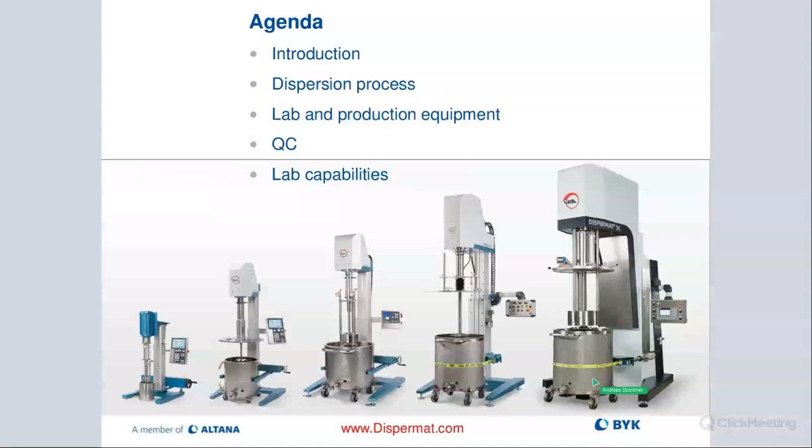And here you can see already on this slide, we offer everything from small-scale laboratory all the way pilot to manufacturing. There's a lot more equipment. This is just a snapshot kind of showing you the line of what we offer.

Okay, so VMA-Getzmann is a German company, founded in 1972 in Germany by this beautiful couple up on the top right, Hermann and Elke Getzmann. They're still alive. Hermann is actually still visiting the office once a week just to make sure that everything runs smoothly and they still follow his design philosophy. The company is run today by his two sons, Martin and Christian Getzmann. They're located about 30 miles east of Cologne, if you're familiar with Germany, kind of in the center of the country, a beautiful part of that region.

BYK-Gardner, or BYK, has had the exclusive distribution rights for North America since 1988, so almost 40 years ago this relationship started. Like I said, the company is still owned by the same family, and they have over 100 employees worldwide. They are known to make really high quality dispersers, different types of bead mills, basket mills. A strong focus is on our basket mill systems, the TML, as some of you are probably familiar with. Then we offer everything from lab scale pilot all the way up to production.

Here you can see on the bottom picture that was the very first Dispermat introduced in 1973. There are actually some customers we know that are still running on the original with the original motors. So these are very well-built systems, and they will run for a very, very long time.

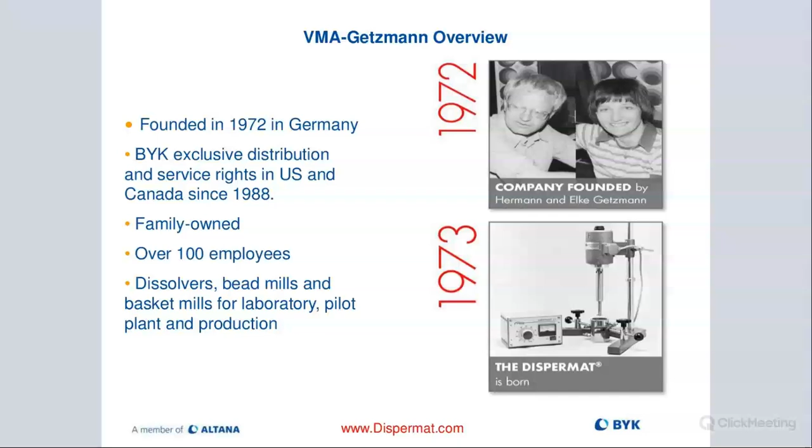So the facility is really state of the art. If you ever happen to be in Germany and would like to stop by and take a visit, please let us know and we can arrange that.

Okay, so obviously dispersing comes out of the coatings world. That's where it's really born, is to break up these agglomerates. And there's different types of pigment classes we look at. So we have the organic pigments, inorganic pigments, functional pigments, and then obviously the metallics, which are the special effect pigments. And they're used to really break down these agglomerates and make these binding forces separate them, and turn these particles to a smaller size.

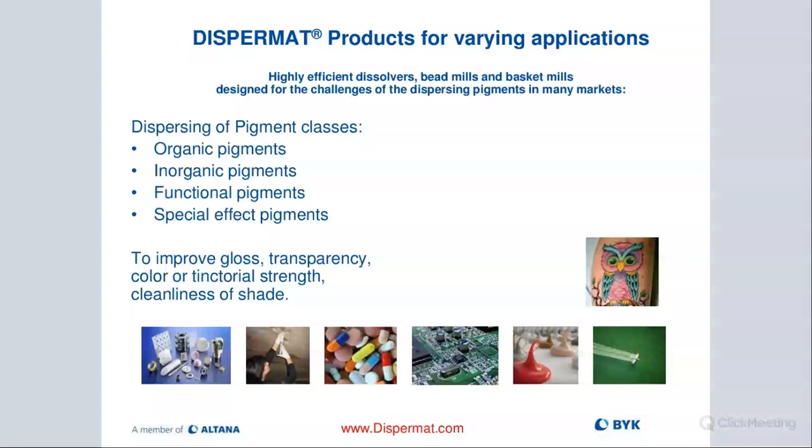So we are dispersing in order to produce better wetting, break up these invisible, almost electromagnetic forces that hold these particles together. They're called the van der Waals forces.

We like to ideally reduce the particles back to the primary particle size, which in turn will give us improved color strength, improve our gloss, give us an overall better appearance.

We can save money by improving our pigment efficiency. We need less pigment because we increase the surface area if we do a proper dispersion.

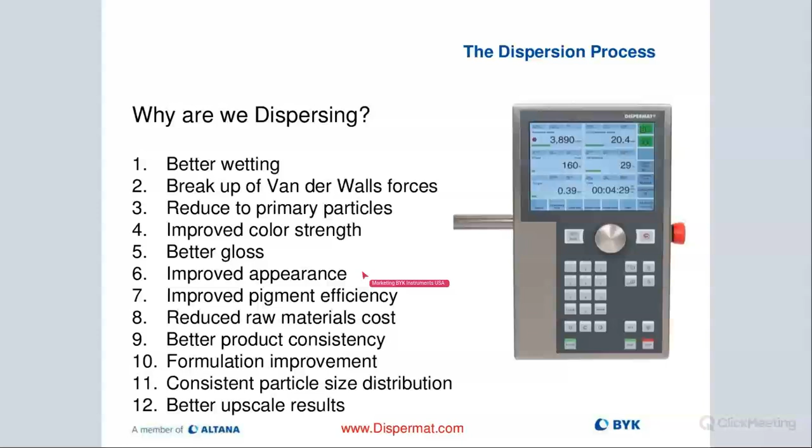And that will help us also reduce the raw material costs, which will then also give us better product consistency, help us with the formulation improvement, and also result in a better particle size distribution, which in turn, if everything is right, should also give us really good upscale results when we go from lab to pilot all the way up to production.

If we don't properly disperse our pigments, then we're going to have some issues. Among those are obviously color shifts, poor stability of our color, pigments flocculate back together.

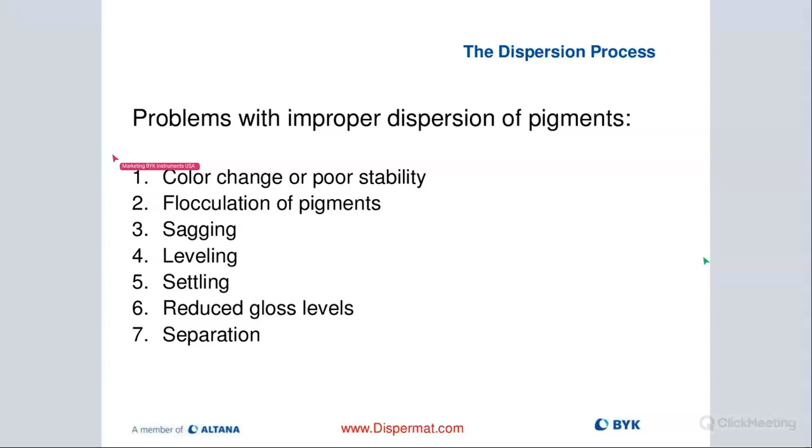Sagging, leveling, and settling are some of the other issues that come up. Our gloss will be diminished. And then also the separation is another problem that we see if we do an improper dispersion of our pigments.

So it's really important to keep in mind that, in order for us to, when we reduce the particle size and we do a proper dispersion, it's really important that we have good stability.

Pigments require strong color fastness to reduce fading over time. Our brightness will be improved dramatically, so this will give us also a much better color. And then pigment size, obviously, the smaller the pigment particles, our transparency would improve, we get better color.

And then, like I said earlier, we can reduce costs by using less pigment, which helps everybody out when we go to market. And then also viscosity.

Usually, we look at trying to keep the viscosity on the lower end. That will give us a better particle size distribution and helps us with processing of the material.

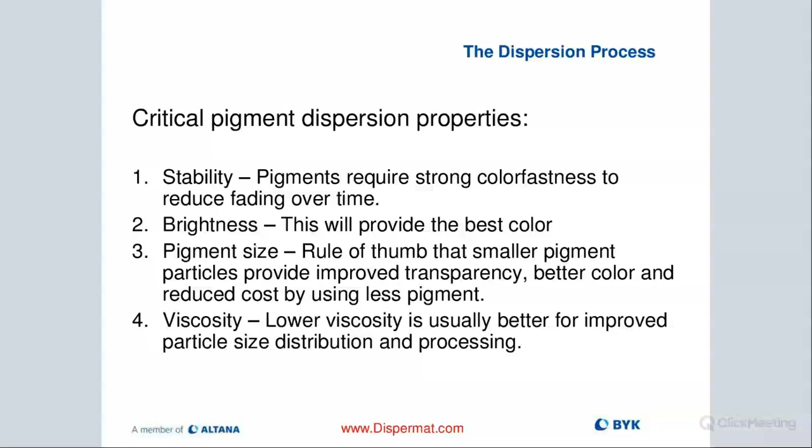If the viscosity is too high, it's very hard to move the material and break up these agglomerates. Also, if the viscosity is too low, then it's very difficult to put in enough energy and the process will just take longer. But viscosity is very critical when we process our slurries.

So critical here is we're not destroying any particles. We're really just looking to breaking up these binding forces. And we are only basically reducing the size by separating the particles and not destroying them. And the agglomerates and aggregates are basically reduced to the primary particle size.

That's the whole goal. And it's really the shear forces. We're using a Cowles blade in the dispersion process with the teeth that help us put in enough shear. And that is really the responsible component for that separation.

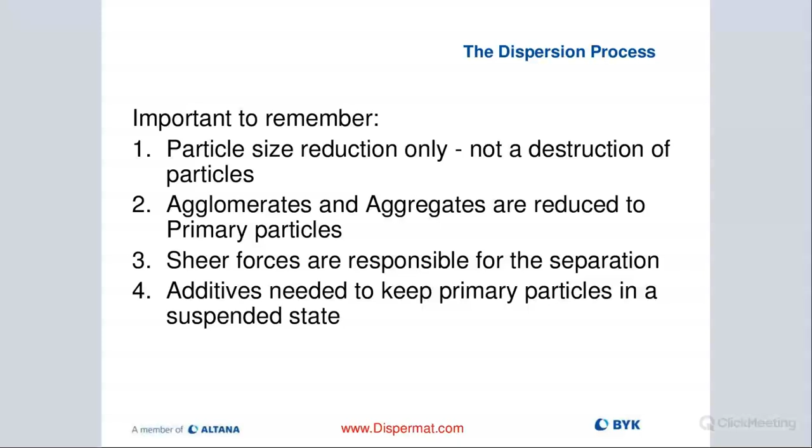And then, as I said before, we need to also look at the right additives to help us keep these particles in a suspended state once they have been separated.

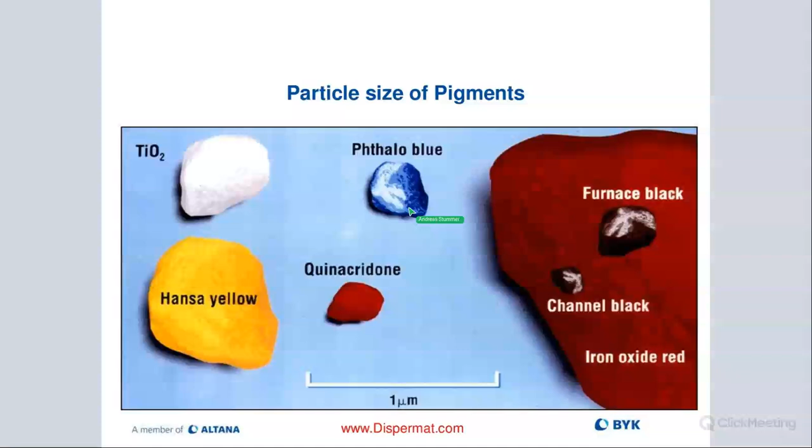This is a good picture here, just giving you a quick look at the different types of pigments. Just you can see the yellow, the Phthalo Blue, just some different pigments here.

By using a Cowles blade, we are able to put in enough shear force to take these agglomerates and reduce them to the aggregate level.

If we want to go from the aggregate level down to the primary particle size, which is a single block, that would mean that we would need to do the milling. That will basically get us from the aggregates down to the primary particle size.

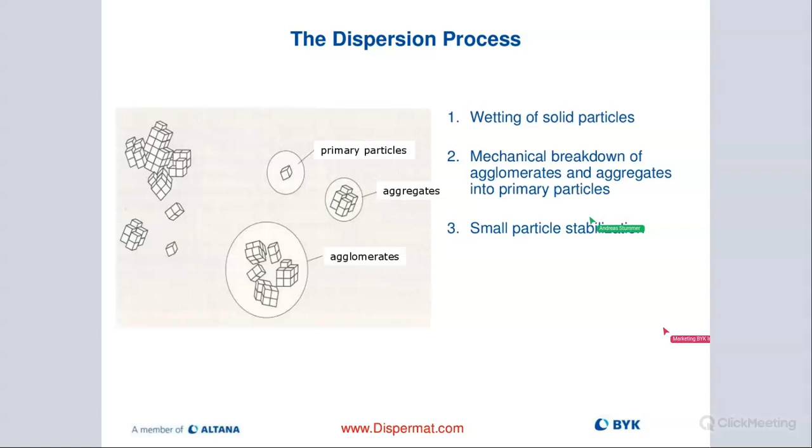But what we talk about today is actually going from the agglomerates down to the aggregates, which will be done via the Cowles blade. So the idea is here wetting of our solid particles, the mechanical breakdown of the agglomerates and aggregates into the primary particle size, and then the small particle stabilization via the additive package.

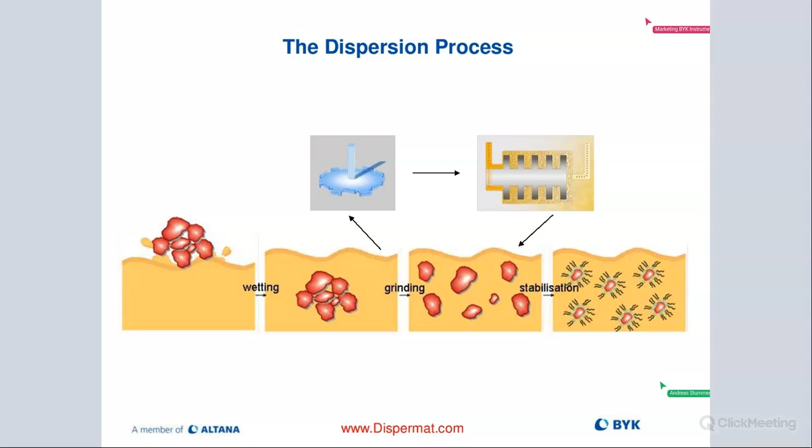Here on this slide, it lays it out really well. You can see with the Cowles blade, we wet our pigments, and then we break up these binding forces, and these agglomerates are turned into aggregates. Then when we reach about 10 to 30 microns, depending on the formulation and the pigment type, is when we actually start the milling process. We want to keep those particles in a suspended state in our slurry so they don't flocculate back together.

Same slide again. This is a great slide, it shows you the breakdown. We always start with the dissolver blade when we pre-disperse. The rule of thumb is about 10 to 30 microns of particle size is how low we can get with a dissolver blade. Anything smaller, we need to look at the milling process, which will be the next segment in a number of weeks. But we can go to about 10 microns with the dissolver blade.

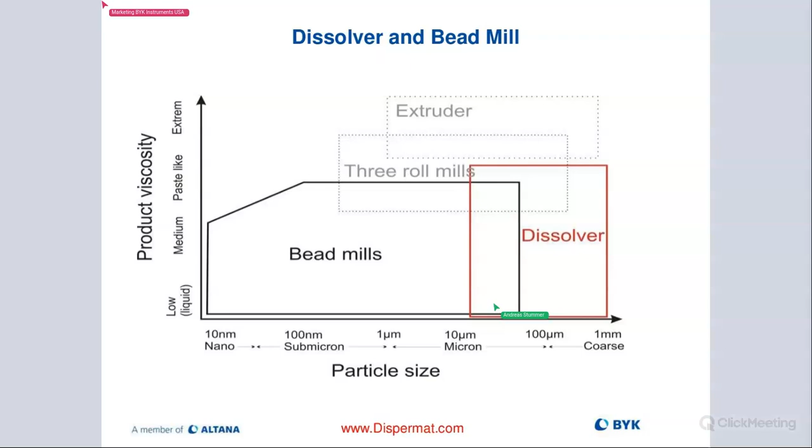Using a disperser or dissolver, one key point is when we use a dissolver disc, we always want to look at tip speed. RPMs are critical, depending on the size of our disperser and the diameter of our blade, but RPMs are only one part of the equation. What we really need to look at is calculating the tip speed. To have a proper pre-dispersion, to put us in the right window, we need between 18 to 25 meters per second of peripheral speed, or tip speed, which is the speed of our blade spinning. For that, we use dissolvers.

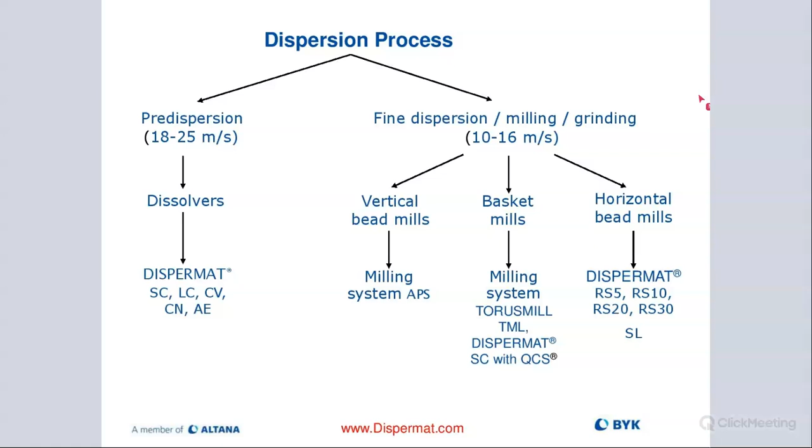This is something we offer seamlessly, not only for production, as you can see here with the SC, but also with all of our smaller laboratory machines. Horizontal bead mills are also used if you really need to reduce particles below 500 nanometers - a horizontal bead mill is required. There we have a whole range, the RS series and the SL for our lab, which I will show you later.

When we start dispersing, we have a container, and we always need to look at the ratio of blade to container. The rule of thumb is we start out with about 1/3 the diameter of our blade to our vessel. That's optimum, if we have a medium viscosity, anywhere from 3,000 to 5,000 centipoise. If our viscosity is lower, we want to decrease our blade diameter. If our viscosity is higher, we want to increase our blade diameter to keep the product moving.

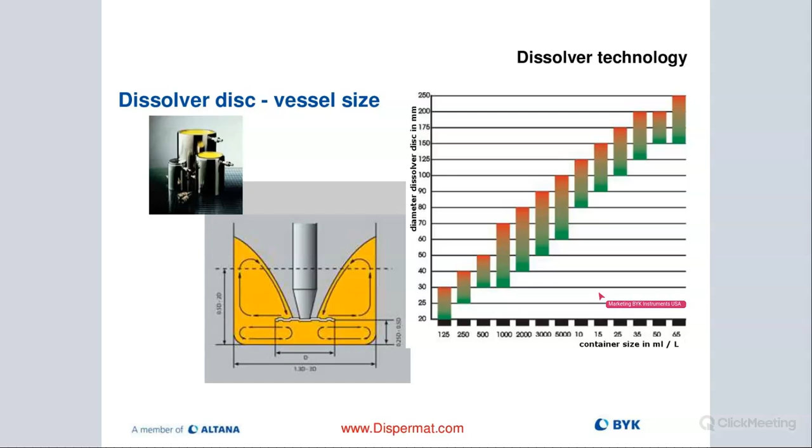You can see on the right side is a chart, and that shows you on the bottom the different container sizes in milliliters. You can clearly see that there is not one blade that fits every container, so we actually have a range. If I take a 1 liter container, which is about a quart, I can use a 30 millimeter blade all the way up to a 70 millimeter blade, depending on the viscosity. If my viscosity is super low, almost like water, I would use a 30 millimeter blade. As my viscosity increases, I would then use a larger blade diameter, all the way up to 70 millimeter. So there's quite a range, but the rule of thumb is optimum is about 1/3. That also means the viscosity and the mill base has been optimized to get a good, proper dispersion.

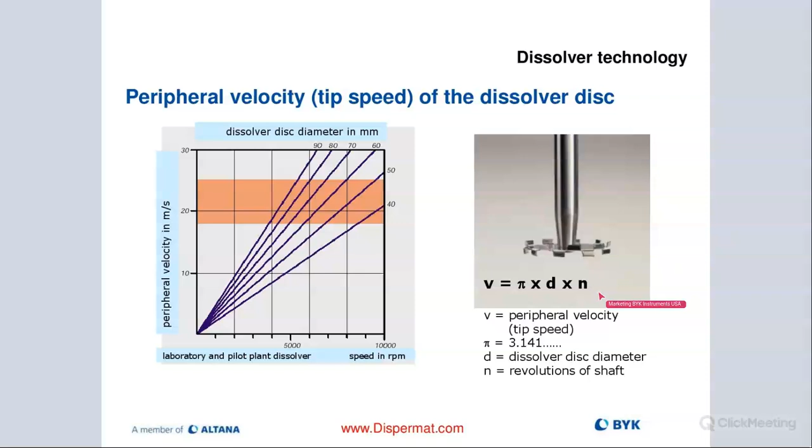If your viscosity is lower, almost like water, say 500 centipoise or less, it's more difficult to achieve the donut, because it would immediately collapse as soon as it's formed, since there's not enough viscosity. And if the viscosity is too high, you probably won't see a donut either, because the blade spins in there and never really gets to form the donut because it's so thick.

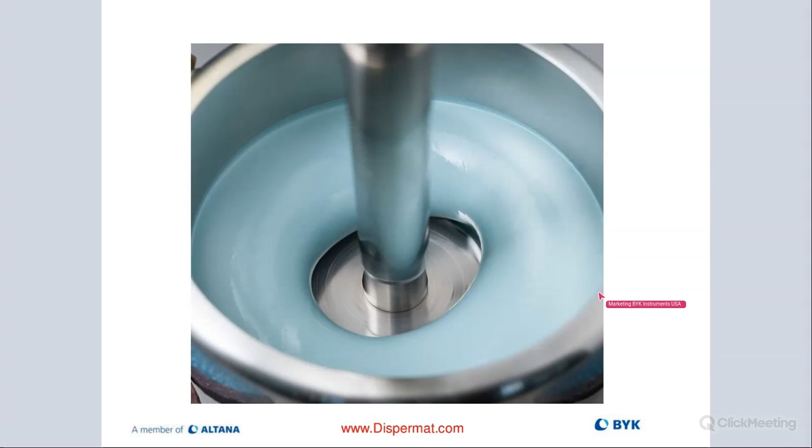But it doesn't mean that you're not dispersing. If your viscosity is low, you just don't see a donut, but you're still dispersing. You may need more time to break up these agglomerates, or change the blade diameter or the amount of energy you're putting in. But you're still achieving a pre-dispersion if you run 18 to 25 meters per second.

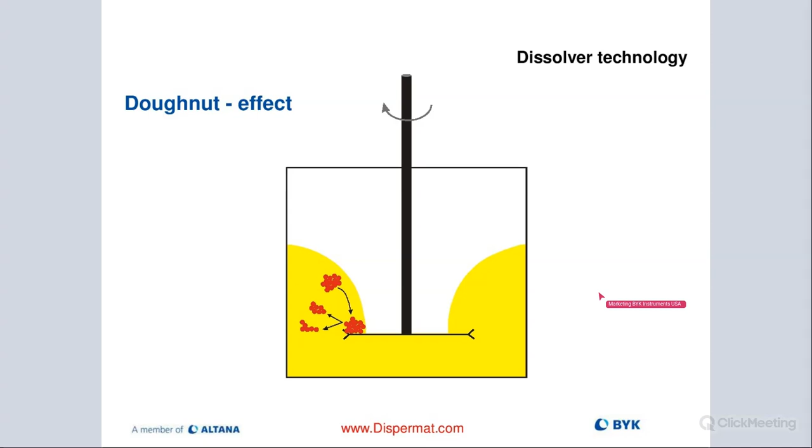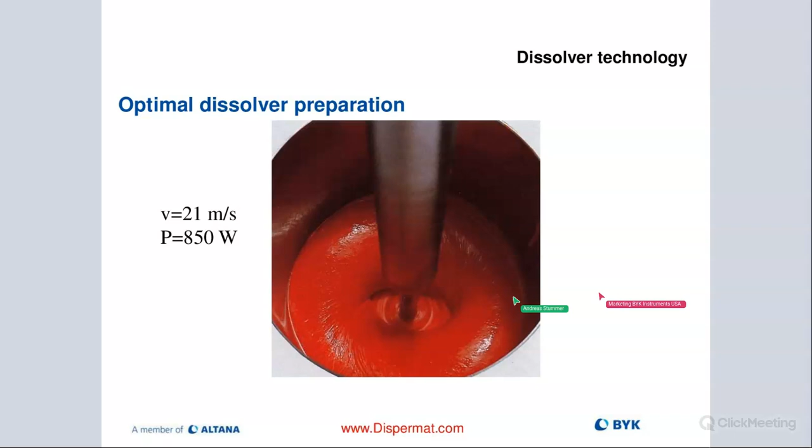Here again you see a nice looking donut. We are putting in about 850 watts of energy, and our tip speed is 21 meters per second, which is optimum, again 18 to 25 is the area we want to be in. Everything looks really good, and we are properly pre-dispersing our material.

Then we have the case where our tip speed is optimized, but we are only putting in 320 watts of energy. Here, our viscosity is very low, and that means it's more difficult to put in energy. This tells you that you'll probably need to disperse longer or change something to get the desired result, or you may want to adjust the formulation to increase the viscosity so you're able to put in more energy for reaching a proper pre-dispersion. This is where the donut is having a difficult time forming because there's not enough viscosity. You could try increasing the tip speed, but it would probably be better to look at the formulation and see if an adjustment can increase viscosity somewhat, allowing us to put in more energy.

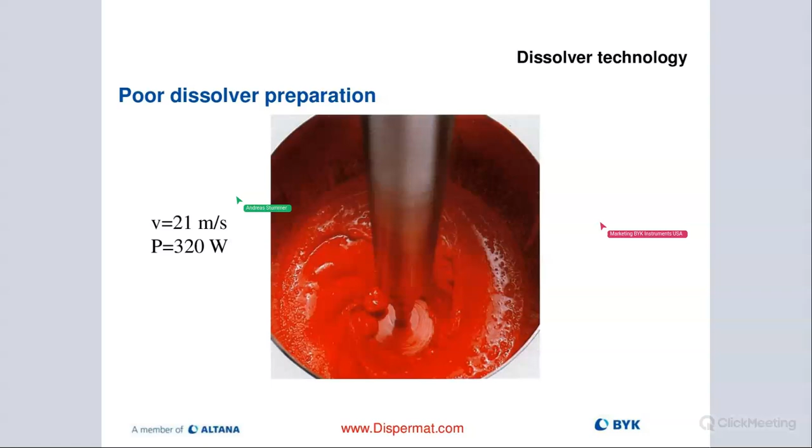Then we have the issue I talked about earlier where we don't have any donut effect. Here, our viscosity is very high. It doesn't mean we're not dispersing, we just don't see a donut because we are still putting in 900 watts of energy, which is really good, but we just don't see the donut due to the high viscosity. So you may want to look at lowering the viscosity a little bit to put it back into that optimum window, but it doesn't mean you're not dispersing, it's just that you don't see a donut in this case. If I look at the amount of energy, 900 watts, pretty good, and you're running at 21 meters per second. So you may be able to make some adjustments to the tip speed, but this right there is a prime example of a very thick material.

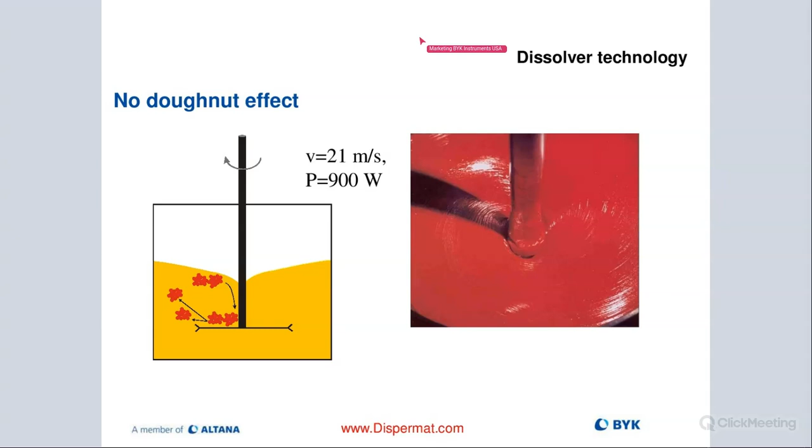Okay, so in order for us to optimize—John, can you move your mouse, the marketing instruments, out of the way? It's popping on the screen, sorry about that, a little bit like a fly flying in front of. Sorry, all right, fly is gone. Continue. Okay, thank you.

So in order for us to optimize the dispersion result, we want to look at the duration of our pre-dispersion. Again, the donut effect, that visual cue we're looking for. Tip speed, really critical, 18 to 25 meters per second. Geometric consideration, meaning the ratio of blade to container.

If the viscosity is higher, we want to use a larger blade. Lower viscosities, we want to reduce the blade diameter. Different types of impeller discs are available. You can see on our website there's a whole range, different arrangement of teeth and designs, also different types of materials. Some people prefer ceramic, DLC coated, or so on. So there's a whole range of different impeller discs.

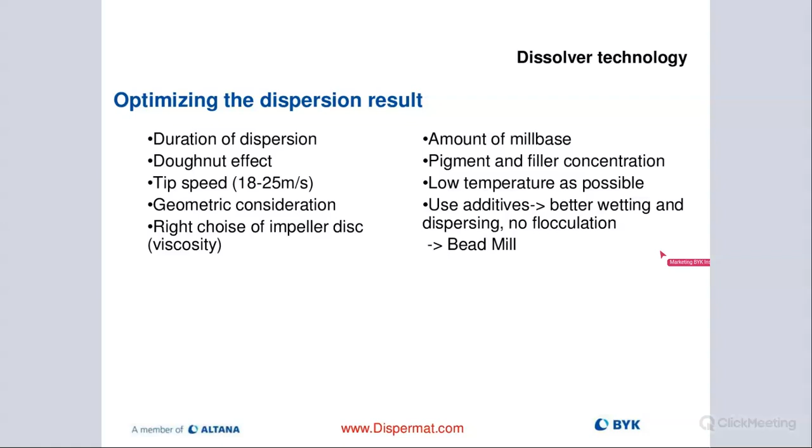Otherwise, the temperature will just rise very rapidly, and we want to avoid that. And then again, additives are critical to give us better wetting and dispersing effect, and no flocculation afterwards, so that the pigments stay in a suspended state. And then the next step would be, once I reach my 10 to 30 microns, that's when I would actually start the bead milling process.

So it's critical to distinguish between the two different processes. When we use a dissolver with a Cowles blade, we're only able to put in a limited amount of energy, just because we're only working with the blade. We don't have any media, no beads. That means our shear forces are going to be somewhat limited, and we are really only deagglomerating our larger particle clusters. We are not really breaking down the particles to the primary particle size. So we're kind of stopping at the aggregate level.

If I want to take the aggregates and go down to primary particle size, that's when it's critical to start the milling process, and it is a critical step for the entire dispersion process. So you can't take your material and go straight to a media mill. That would probably lead to clogging of your screen or dynamic gap, and then you're not going to have any flow of your material. So it's very important that you first pre-disperse before you start the milling.

And then again, as you saw earlier, you're going to have problems with the quality of your product. If you only pre-disperse and you don't mill, you're going to have poor color development, insufficient gloss, those issues, cleanliness of shade, lack of transparency. So that's all going to be related back to just using a dissolver blade and not milling. When we are bead milling, we're going to be able to put in a lot more energy with the beads and the rotor.

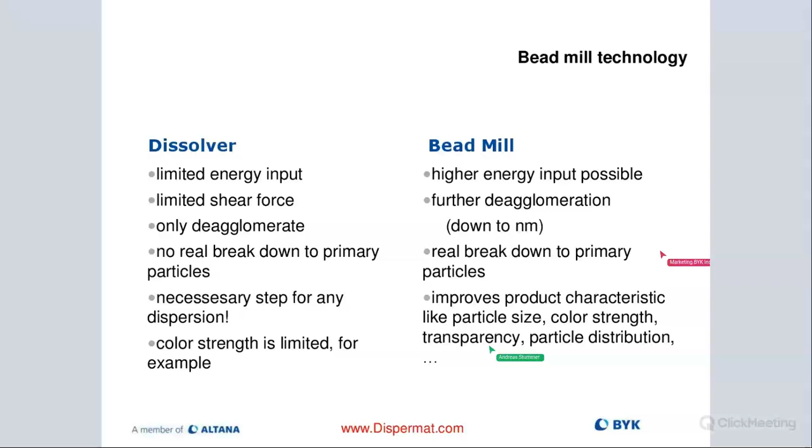It's no problem, but you have to use the right media size to get you down there, and that will give us the best looking product. It also helps you save money because you create more surface area, which helps you cut back on the amount of pigment in your formula. It gives you better color strength, better transparency, and overall better particle size distribution when you properly mill your material.

So here's a picture of the lab scale dissolver. In this case, we're looking at an AE model. Here we have a number of different safety features, including the working area adjustment, which we call H1 and H2.

So if you look at that container, we can actually set a threshold for the upper limit and the lower limit. That means you can safely operate the disperser with the blade in between those two reference points, which we call H1 and H2.

So let's say somebody were to pre-disperse and run, let's say, 10,000 RPMs, and you were to lift the up button, then the blade would stop at the upper reference point you set, depending on the container size. That means there would be no moving parts outside of the container, no product splashing around your lab, and nobody would get hurt by the blade spinning at 10,000 RPM.

And then on the bottom, we can also set the threshold so that the blade would not hit the container bottom. It's also important that you don't want metal scraping, so that's really critical.

The H1 and H2 are standard with our laboratory dissolvers, with the series, the new CV3 Evo, and also our CN model and AE flagship model that you can see right there. Depending on the size, we can go all the way up to about 20,000 RPMs.

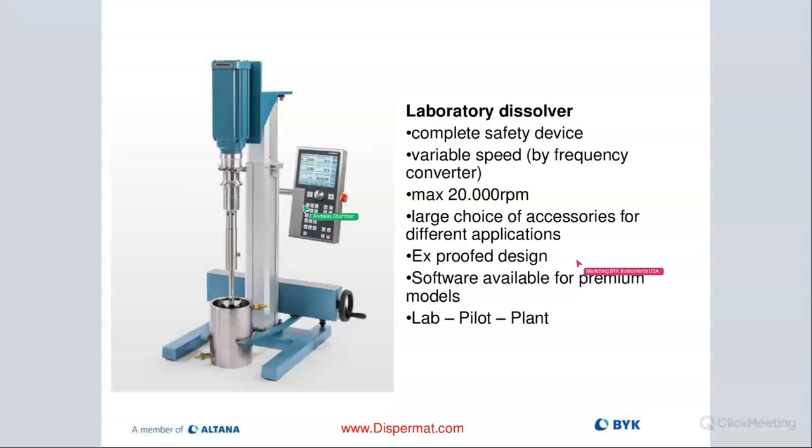You also have the ability to look at a chart, graphing all these different values, so you can see a trend line for your speed, your energy input, your torque value, and your temperature. So it's really helpful, and the C technology allows you to do that. It's available not only for the lab scale, but also pilot and plant size models.

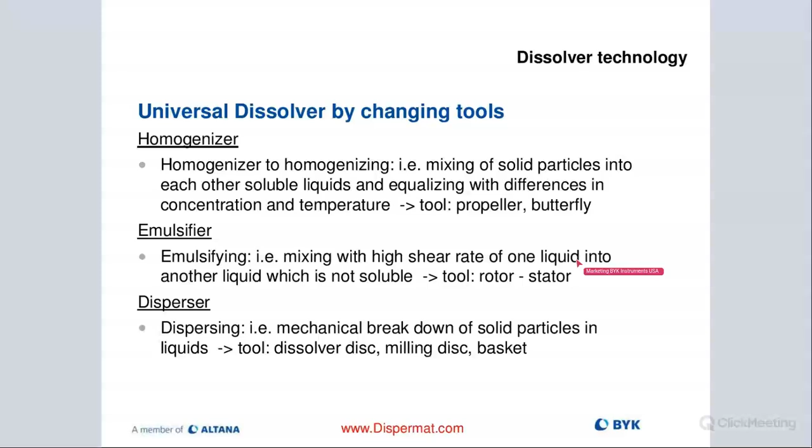So this Dispermat, our dissolver line, can be used as a homogenizer, where you mix, using a propeller blade or a butterfly stirrer blade. You can use it as an emulsifier or as a disperser, where you actually break up these invisible forces, these van der Waals forces, with the cowles blade, and then convert it over to a mill, depending on the attachment that you put on there.

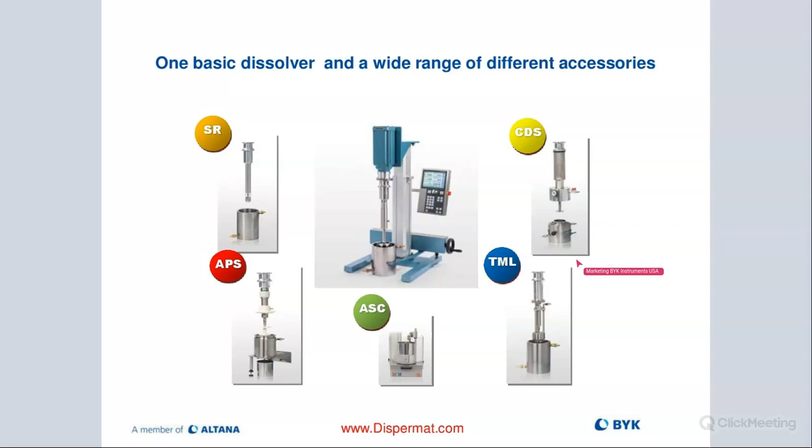We have this quick change system. If you look at the shaft in the middle, right below the motor, there is a clamping ring, and that whole assembly — you remove the clamping ring, turn the shaft assembly 180 degrees, and pull out the shaft, then replace it with any of these attachments, except the wall scraper system. It takes less than a minute, and the dissolver will turn into a rotor stator or a milling system.

So just giving you a quick overview, I don't want to spend a lot of time on that. We have a whole different range of dispersers.

For laboratory scale, very small volumes, something very simple, easy to use, we have our LC line, no real bells and whistles. It does have the safety features, but basically you are looking at a control panel that just shows you the speed and a timer function. That's all there's to it.

You would lift the motor up and the shaft manually. You can see there is a lever on the right side of the motor, and you turn that, and then you can lift the motor up and down the stand, positioning it at the right height. On the smaller scale model, like the LC, that's really easy to do because the motor isn't that heavy, so it just slides really nicely up and down, and you can position it where you want the blade to be.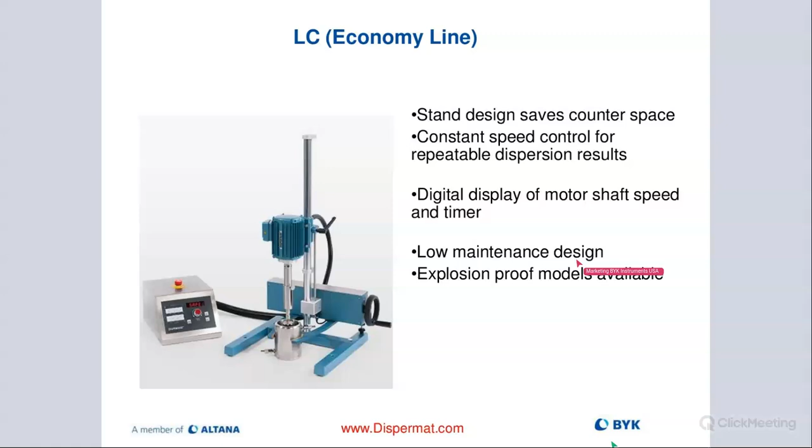You see the wheel on the right side of the clamping system, right above the stand. That actually is used to loosen and tighten the container clamp. It's very important that the container is always clamped absolutely tight so that it doesn't wiggle around. You don't want it to move and then the blade hitting the container wall at very high speeds. That's not good, especially when you're running with solvent based products, and you always want the blade to be perfectly centered, so that will help you really center the blade and make sure it doesn't get in contact with the container walls. And then we also offer an explosion-proof version with our LC line, the LCEX.

This is the new innovation this year, the CV3 Evo. It's replacing the standard CV3. It comes with the CV control panel, which is almost the same as the C control panel, so you're able to look at your speed, your energy input, your torque value, your timer function.

You have a temperature readout. We offer a basic and advanced version. The advanced will also have the integrated scale, which allows you to take measurements, and then you can actually see the measurements on the display, which is really cool. On the advanced model, you can also track and store all the data, so if you want to look at that later on, or you want to create a lab report, the advanced model is designed to help you do that.

This is really good technology for scaling up. So if I want to use all the data and go from lab to pilot or production, then these are the values that I'm looking for. It'll also give you the actual tip speed displayed on the top right of our control panel, which is the critical value we're looking for, 18 to 25 when we are pre-dispersing. And then if I put a basket mill on here, I'll be able to see the same values, but then I want to be running at 10 to 16 meters per second. I can't say that enough because the question always comes up: how fast are we running our disperser? What are we looking for? Or if we are milling with the system, what are we looking for?

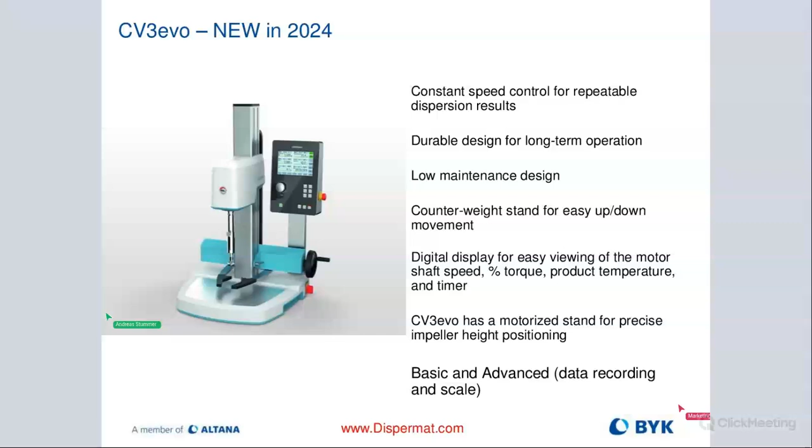Then we have the CN line, which is kind of our bread and butter instrument for small to medium-sized batches. We can also upscale that to pilot. It has the CN control panel, giving you your speed, torque value, temperature readout, and a timer function.

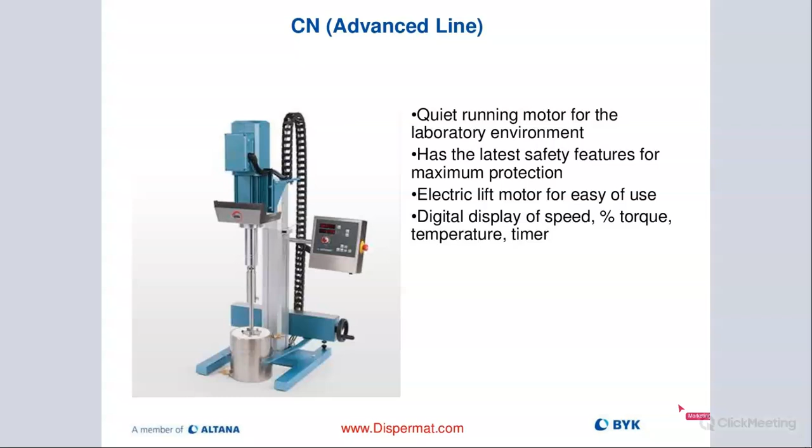Again, all the safety features are built in, as I mentioned earlier, but the beauty of it is that it's scalable. So you can see here, you're staying within the CN line, but now you're looking at a pilot scale model, again with the same brushless step motor technology, even on the larger models.

They are really, really quiet and there are hardly any vibrations to the motor. The shaft goes straight into the motor, so there are no belts or O-rings or anything like that you need to replace. They're practically maintenance free.

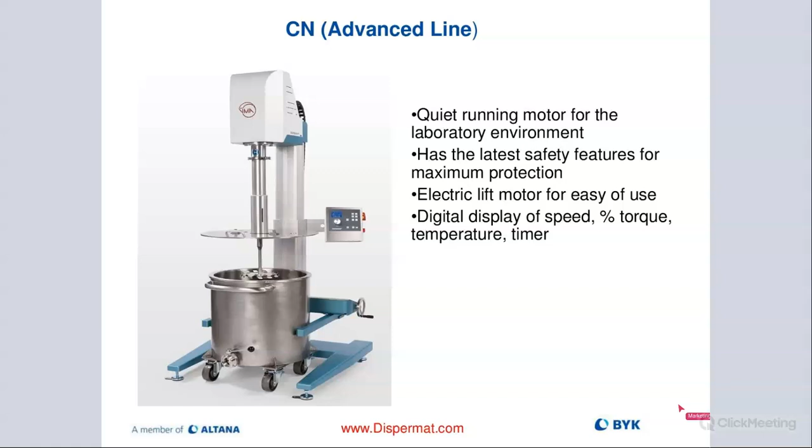And we have customers that are really running on the original Dispermat motors for over 30 years. I've been with the company for 18 years now, and I've never seen a broken motor. That speaks for the quality and the design - just a really, really, really well-built piece of equipment.

Then this again is the AE with our C control panel. That's like the flagship model that we have, especially useful for upscale. And we also offer pilot scale models in the AE line.

So very cool - you can basically create batches, store the data, give batches a name either by product name or by product number. You can upscale really well because you have all the data. You can see on the display the actual trend lines for each of the values.

During the dispersion process, you can do a net power calibration, which basically means you can set all the values to a zero point when you're running without product in the beginning, because as the machine is spinning, the motor is turning, the shaft is turning, it's already using energy. By doing a net power calibration, you can set that value to zero, meaning all the values are only related to your product, like the energy input or torque value, with no influence from the machine itself. That's the net power calibration feature.

You can program cutoff values, meaning if you have a temperature limit and don't want to exceed, say, 80°C, you can program the machine to cut off once it reaches 80°C, or give you warnings before - there's two different warning stages. You can program it so you say, I want to be warned at 70°C and at 75°C, and at 80°C the machine will turn off or run with a different speed or energy input. So you can really customize it the way you think it works best for your process.

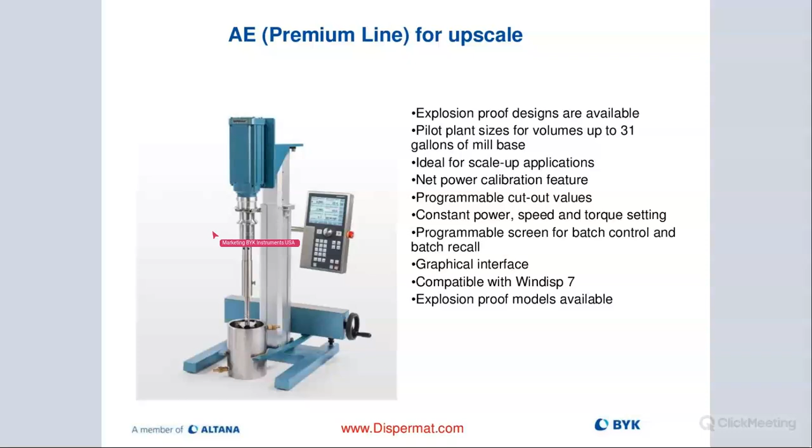And then we have explosion-proof models as well. We can go all the way up to 31 gallons of mill base. Ideal for scale up, if you want to go to production.

Again, because we're using the C technology, we can do the net power calibration, program these cutoff values, and set up the machine to run not only with a certain speed, but also with the amount of energy we want to put in. That means if I'm running with constant power, as the viscosity changes during the dispersion process, my machine would automatically adjust the speed to always maintain the amount of energy we are putting in.

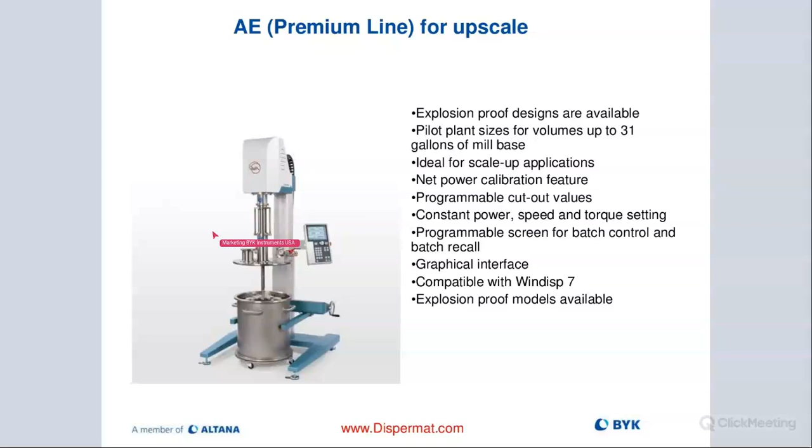Fully programmable, explosion-proof models are available, not only lab scale, but also for the pilot scale models. Then we offer a whole line of production dispersers.

So you're looking at the Dispermat SC. We can go up to about 2,000 liters of volume. The beauty of it is, again, fully modular. We have that quick change system.

We can very quickly fit a basket mill on there, meaning I'm buying a dissolver, but let's say I want to also mill with the same machine. I get the quick change system, and now I'm milling with the basket mill. It's perfect, so I don't need to buy multiple pieces of equipment. Everything, dispersing and milling, can be done on one machine.

Some people require vacuum, so that's also an option with the vacuum cover and the vacuum container. We can pull out the air for better dispersing and milling effect. We can also add nitrogen if we want to create a nitrogen blanket, or argon gas, for some new end-use market applications like fuel cell development or batteries. So that's also an option. The cover is removable, so you have access for cleaning.

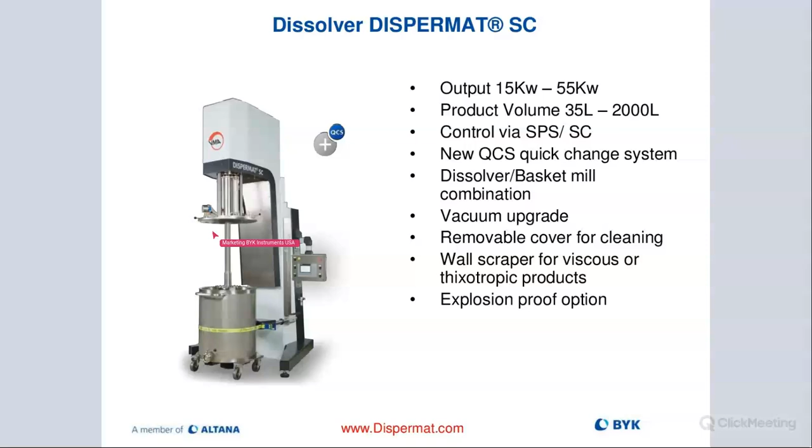And then certain materials that are very viscous require wall scraper systems, so that is also an option with our production scale machines. And then again, explosion-proof models are available.

So if I want to transfer from the container to another container, air is the big enemy. By removing air, I have a much better transfer efficiency from one container to another if I'm pumping out my material. That means I have much faster product transfer, improved homogenization, cost savings. I'm going to be doing everything quicker.

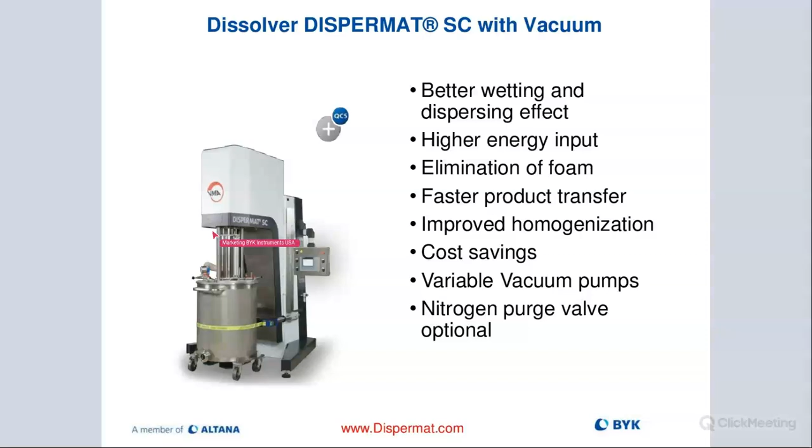There's different types of vacuum pumps that we offer depending on the container size and how much vacuum you need to pull. And then again, we have the option of adding ports for nitrogen, argon, or any other type of inert gas you may want to use.

Quality control. Quickly on the left, you can see the C control panel giving you your speed on the top left. Then right below in watts, the energy input, 2,380 watts right there. Right below that, we have an indirect measurement of our viscosity in terms of torque. On the top right, we're actually showing you the tip speed, 25.4. Temperature readout, 42C. And then on the bottom, we have our timer function.

Then the two windows on the top right corner, you can see H1, H2, which is the safety device for our reference points, container reference points, and then the container clamping safety system right below. They would light up green when they are operational, or the machine is in safe mode. If one of those two is not in a safe state, it would appear red, and then you wouldn't be able to turn on the machine.

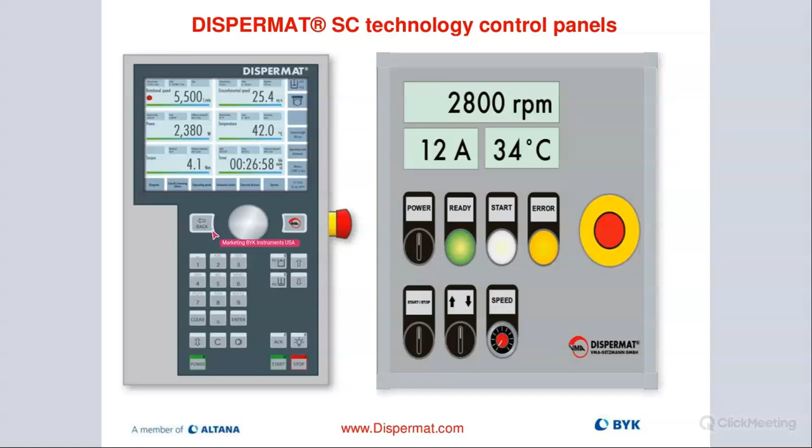We offer that for the lab, pilot, as well as manufacturing size machines. And then on the right side, we have a very simple control panel. We call it the M technology for manufacturing. Some customers prefer really simple in the manufacturing environment, a little bit more sophisticated for the lab, but we offer both options.

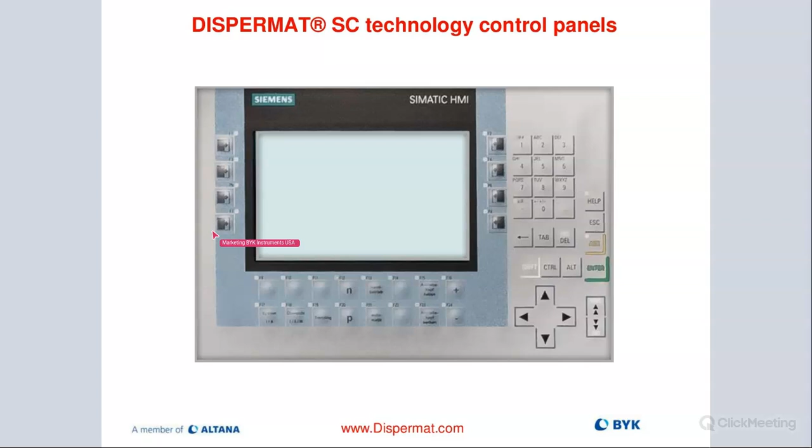And then obviously, here is a PLC controller made by Siemens. We work with that company, giving you the flexibility of doing your own programming and maybe integrating that system to your entire workflow process. If you want to add a scale, a load cell, or anything like that, they can all be programmed, and then that would be the ideal solution for that.

Here is just a snapshot of the control capability with the C technology. So, for example, we have a Blue 1, just give it a name, and then you can program how much energy you want to put in. In this case, we have 5,000 RPMs. We're not running with constant power.

Then the diameter of our blade is 50 millimeters. The container size is 1,000 milliliters. We're using H1, H2 settings, so the height is 80, the bottom is 5 millimeter. The actual disperser blade height would be 14 millimeters. The timer is set to 45 minutes.

And then we have on the right side the cutoff values for all of our different indices, and then we have the graphical interface. Actually, these are pictures from an older version of a C controller, but you get the idea.

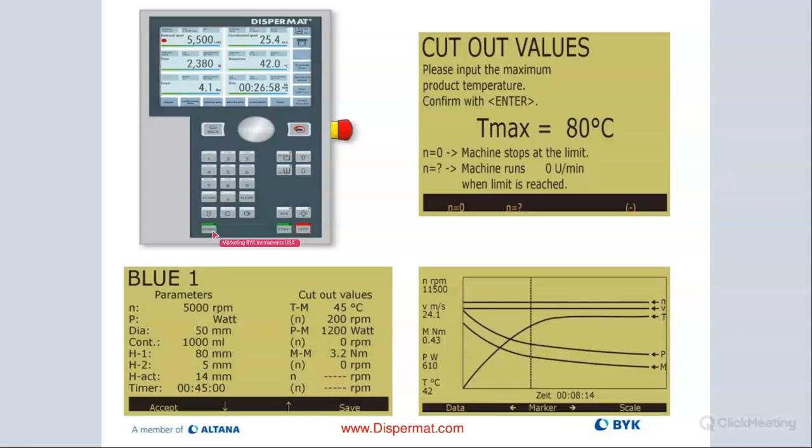You can actually look at the trend lines for each of these values and watch the dispersion process in real time. So if you see a spike, for example, in temperature, it will show up right there, and you can say, 'Hey, what's going on?' Or if you're running with constant power and your speed increases, meaning your viscosity is dropping, you'd probably also see that on the torque curve. It's really nice that you can see all these different values on display very easily with the C technology.

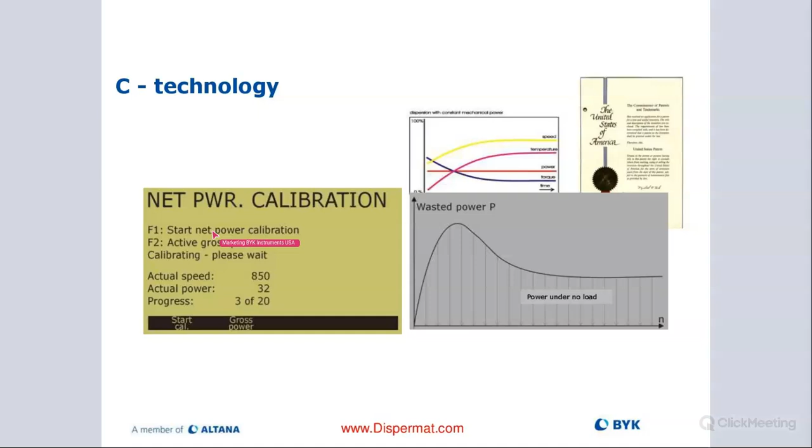The net power calibration, I already explained that earlier, that you can set the machine to a zero point in terms of the amount of energy you're putting in. So that means when you're running it, all the values are really related to your product and not any machine input.

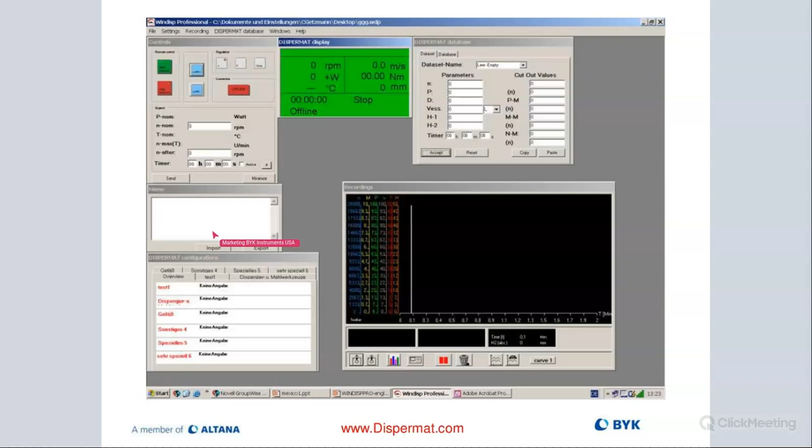That is the WinDisp software we offer. We're actually moving away from that for the new models because we feel it's easier to do all the data tracking in the Excel sheet. So that's something we're looking at. We still offer the WinDisp 7, but personally I think with the Excel capability and the transfer, it makes things a lot simpler. But here you can see the trending and everything can also be done in the WinDisp software.

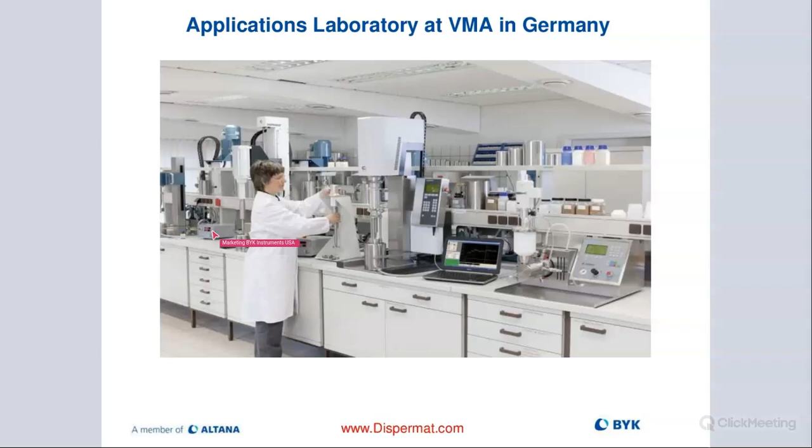We have an applications lab in Germany at VMA, obviously, where you can come visit and we can do trials, if you have a facility over there or just want to visit. We also have a nice lab in Wallingford with a lot more capabilities. We're adding a new vacuum dissolver, we have a horizontal bead mill, and we have the new AE, which you can see right there. So some of the newer machines out there.

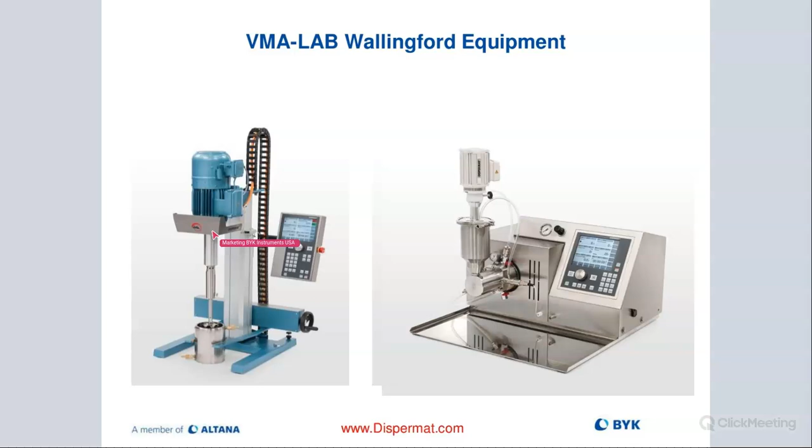If you have any application you want to really test out with a basket mill, for example, or a vacuum system, let us know. We'd be more than welcome to have you up there and take a look at the equipment capabilities. The Wallingford lab really is state of the art, at BYK USA. One of the big advantages of having it up there with our sister company is that we can leverage the synergies between the instruments and the additive business.

I can't stress that enough. It's always important that you have somebody on site who understands formulation. So if you're looking at selecting equipment, having somebody who also understands the additive packages that help with certain formulations, and how they relate to the instrument, can be really helpful from an upscaling perspective. We don't look at ourselves as somebody who just wants to sell you a piece of hardware, a dissolver or a bead mill. We want to really help you make the best possible product, including everything from a support angle, also selecting the right additive package for your formula if you need that help or assistance, and then testing it out on our equipment.

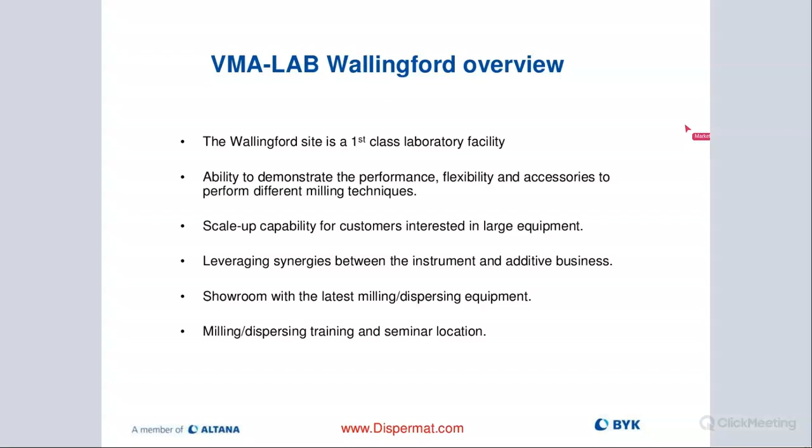So that's some of the big advantages of having the lab up at BYK USA and working hand in hand with our colleagues and our customers, giving you the best possible solution. If you just want to come in and look at the equipment without running a trial, you're more than welcome to come up there. We'll spend a day with you walking around the facility, showing you everything. We can also use the time to do a seminar like we did today, maybe more in depth, related to your product. So let us know, but we'd be more than happy to welcome you at the facility.

So this concludes the presentation today. Thank you very much.